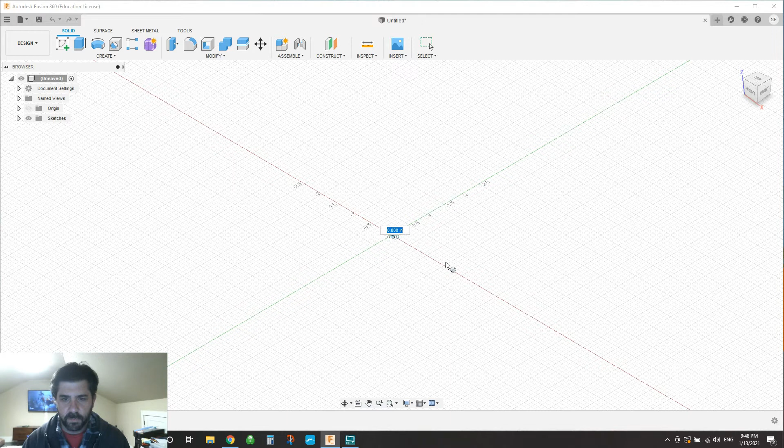So if we go here to a coil, I put it right here on this bottom plane. Just going to bring it out 3 inches, leave it 1 revolution, and here's a triangle coil. I'm not doing circle or square, I'm just going to triangle coil. Hit OK.

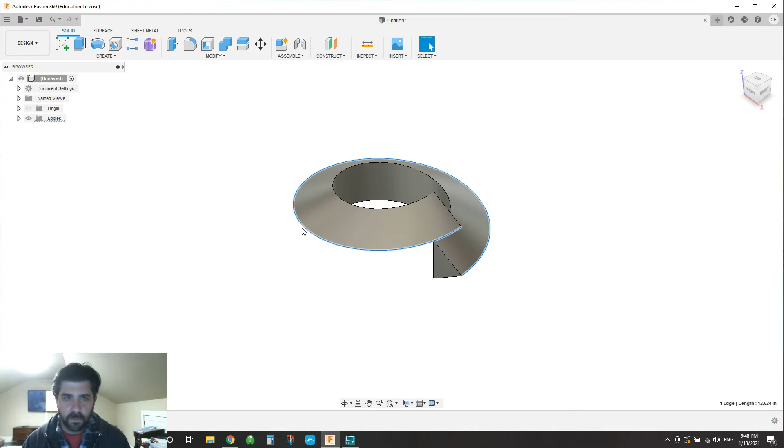Now, if we just simply want to chamfer the outside edge here, or inside, depending on where it is, you just click that, come here to chamfer, and do something like 0.2 inches. Okay, now there you go, you're chamfered. Now, if that's not the end you were talking about, and you're actually talking about these ends over here, it's a little less straightforward.

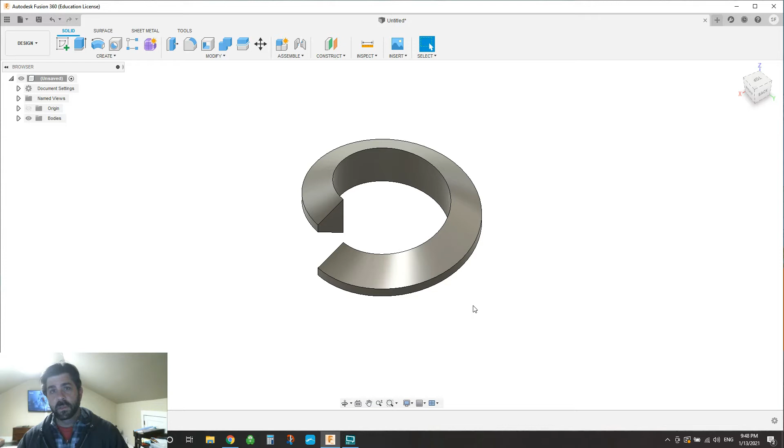On the video I think you referenced, I was using a circle thread, and doing a circle thread it's a little bit easier to chamfer. So normally what I would do is pick this end, do the same thing, come here to chamfer, and do a 0.2 again.

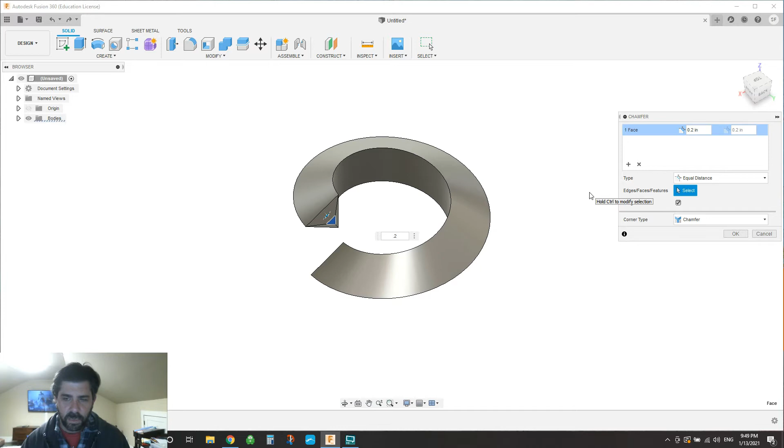And it didn't really work. Do 0.1 — you have to play with it a little bit, and it may not like that chamfer I put on the end, so I'm going to get rid of that, pick it one more time, let's do a chamfer again, 0.2. So I get a little bit of a chamfer — it's literally taking all the edges and putting that 200 thousandths of an inch chamfer on the ends of it.

That may or may not be what you're looking for, and it's only going to let you go so far, until you essentially get this thing down to a point. Maybe I can do a 0.26, 27 — yeah, it doesn't like a 0.27, so 0.265, and I get down to a really fine point. So you kind of have to play with that a little bit if that's what you're looking for.

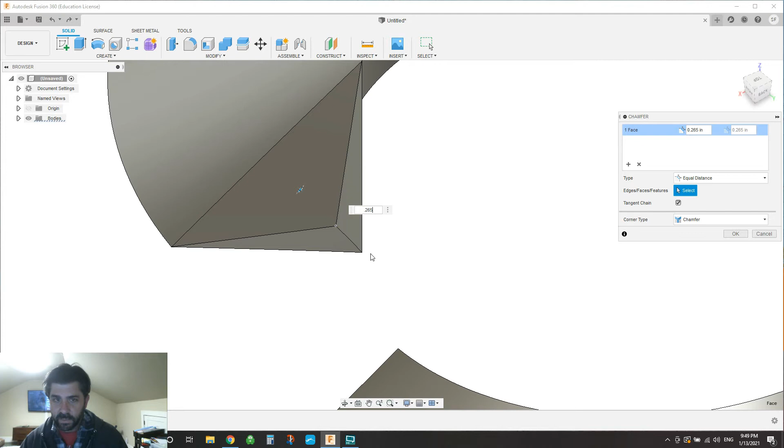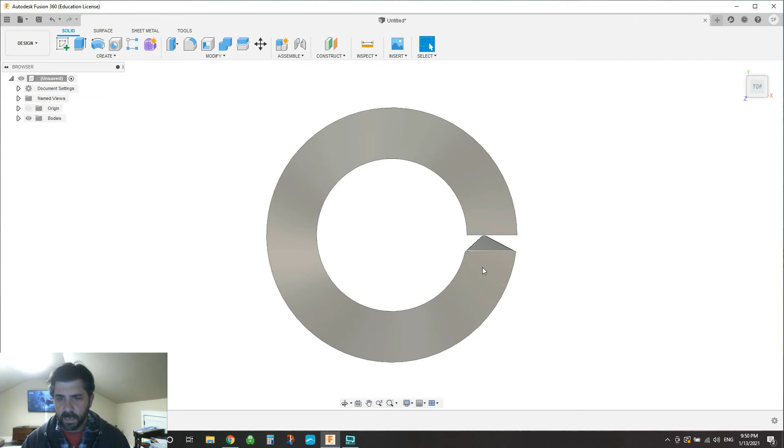Now, if you're actually looking for this to be a slant, off at an angle, I think there's probably a different method you'd go about doing that, and I would do it using a split body with a construction plane. So here's how I think I'd do that if I had a requirement — let's say if we were looking at this from the top, to actually cut this back at, say, something steep like a 30 degree angle, I would do it this way.

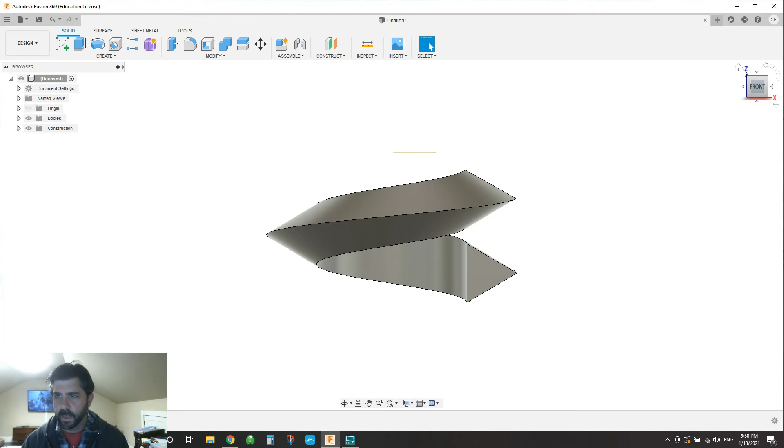Construction plane — I would pick the bottom surface that we put this on, and I'd bring the plane up above our coil here, let's just go to the side here and make sure we're above our coil, hit OK. I'm going to orient back home here, and do a sketch on that construction plane. So sketch, construction plane, and then again orient back to the top, and I'm just going to sketch a line.

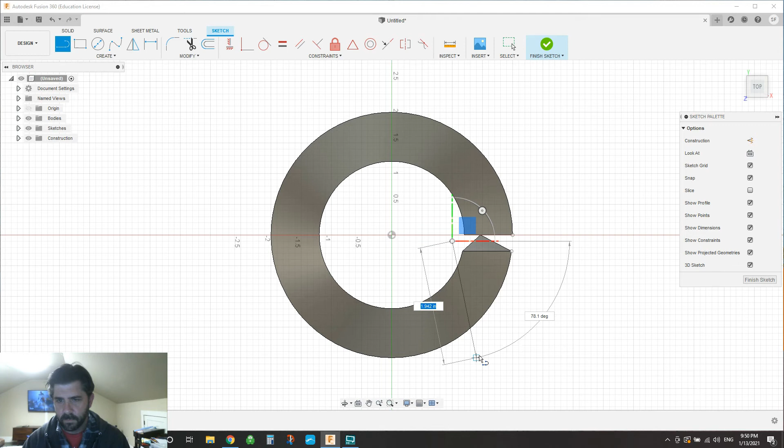From here, and I'm just going to cut this guy back. I don't like where that line is, let's try this one more time here — just going to chunk it right here on this corner, and say I'll bring it back here, escape that, and hit finish.

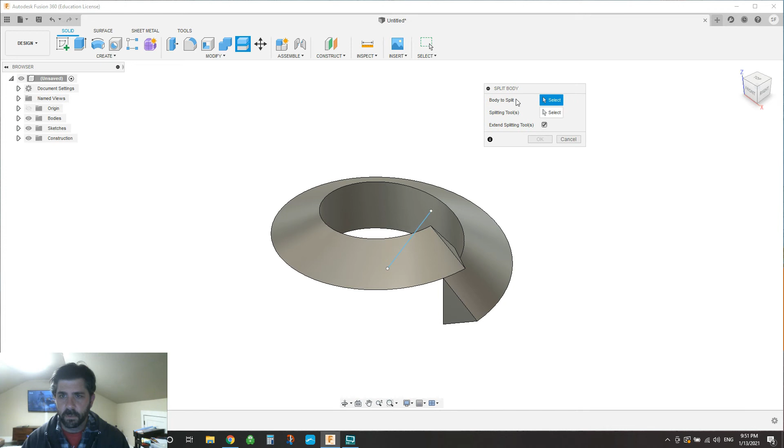So now I've got our body and our line up here on our construction plane. So what we'll do now is a split body — go to modify, split body, and it's prompting you here what to do. So pick the body to split, and you can either click it that way or do it over here on the left side with the bodies.

And now it's asking you for your splitting tool, which is the line we just created. And so now you can see it's putting a split, extending that through the surface. You can localize it like this. If you've got a coil with lots of wraps on it, you're going to have multiple bodies no matter what.

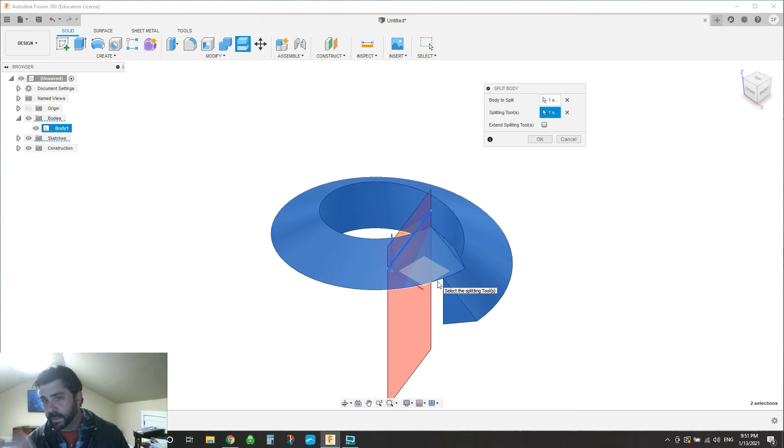Now there's a way to get around it, so it's okay. I'm going to go ahead and say extend this just to show you sort of worst case scenario, and hit OK. So now what we've got listed here is 3 bodies, right? We had 1 coil, now we've got 3 bodies.

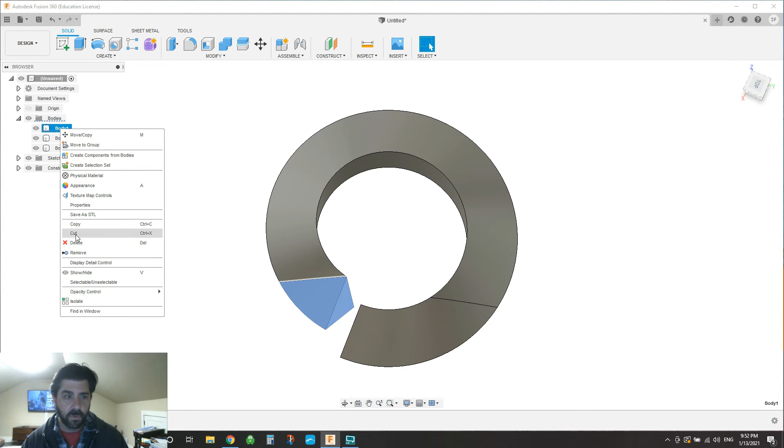But if you want to just keep that chamfer and join those 2 back, it's real easy. If you just highlight here, now you can see on the left side of your screen that this is the body that we want to get rid of. I never like deleting — you should always just either hide it, turning the eyeball off, or remove. So if you really are never going to use it again, just remove.

Now if you want to rejoin this coil back together, it's super easy. You're just going to do a modify and combine. So your target body is that body, your tool body is that body, and you're going to join. And now you've got your coil back together.

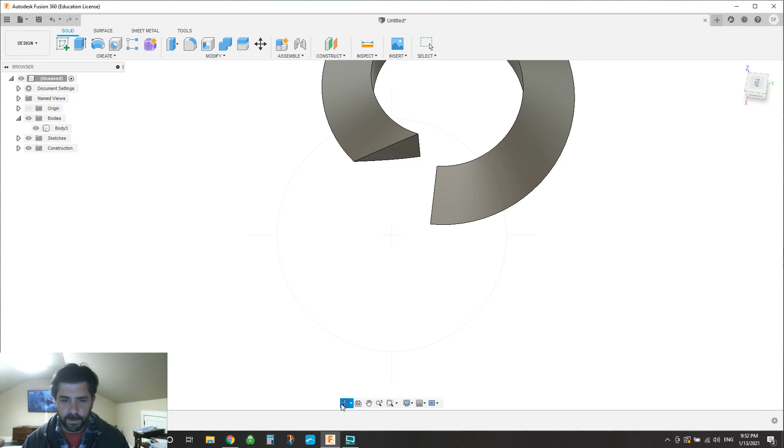Now if you need to do the same thing to the other one, you just reverse the process, and you can actually do that same thing but from this bottom plane. So we can do a sketch here on the bottom plane, reorient, and then do a line. I'm just going to do it from right here, and pull it back, end that, finish sketch, and then do the same thing — split body, remove it, and then you'll be back to the one body.